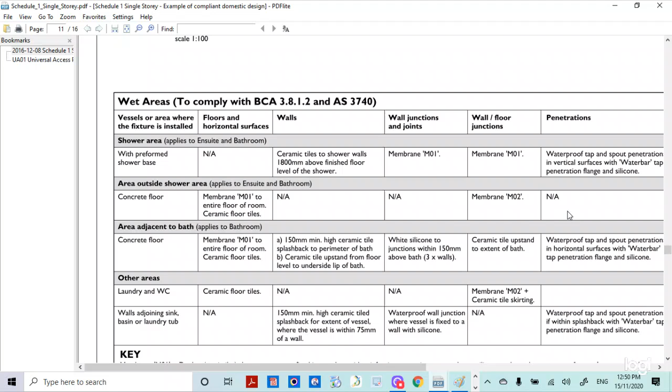For wet areas, the design diagram requirements are here. The wet areas are the shower and the bathroom - those are the wet area. This table shows details of construction, detailed components of the wet area.

Across the Australian standards, what do these comply with? Those things you can see in this table. So the wet area includes the shower area, outside the shower area adjacent to the bath, and other areas. Those areas are kind of construction for the floor and the horizontal surface, how they will be constructed, and the requirements for the wall and wall junction, the joints, and wall floor junction. Those are the components and parts of the wet area.

Depending on the wet area's construction method, appropriate presentation needs to be done. Those things you can see in the table - the components related to the wet area and what materials should be installed in the areas where water can reach. This is explained, and related to this, we will continue looking at the building design construction handbook.

So we also look at this component of the building design construction handbook. In this case, the required chapter to look at detailing is here - this is for the anchorage to the wall, anchorage to wall and the composite. Those are the components of the building design construction handbook.

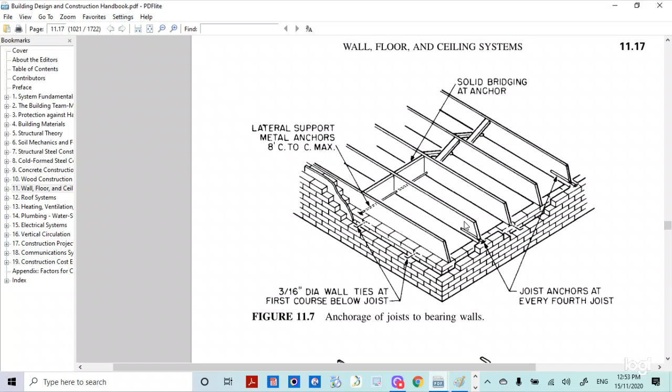So here you see this as the appropriate floor construction and wall construction, and also the anchorage and the bridging - how to bridge to the anchor and how to connect the joists. Those things you can see in 11/17. So those are the components of the anchor used between the masonry wall and the structural framing.

These are the figures of the anchors that connect the structural framing and the masonry wall. Those can be found in figure 11.8. So figure 11.8 shows this anchor for use between the masonry wall and the structural framing - the different kinds of anchor you can see in this diagram.

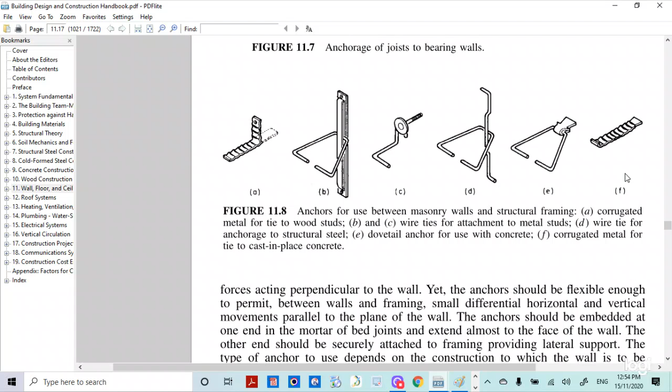Here this shows how to connect the anchor and the joist, their diagram. This one you can see how to connect the anchor and the joist in the diagram. And this is for how the concrete wall, how the concrete slab's construction diagram works - this is the anchorage.

This shows wall construction connection, how to apply the anchor. Between the wall and anchor, how it should be used is shown here. So this is for how an anchor is to be utilized between the floor and anchor - how to construct the anchor is shown here. So firstly we are talking about the building design construction handbook.

So this is the diagram. In the diagram shown here, this is the frame construction pattern that needs to be built. So this one shows the frame construction diagram - those are the components of the frame.

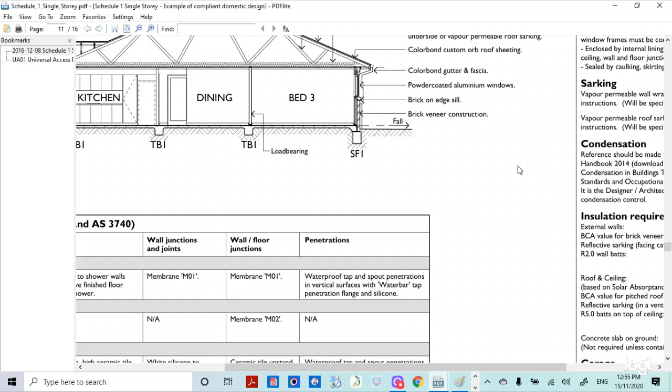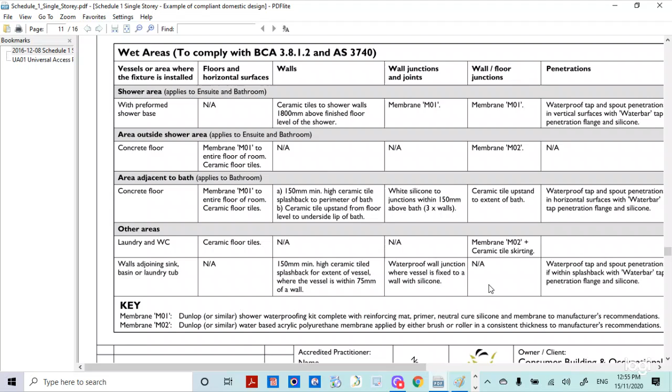They are civil construction, so the requirement to provide - the relevant chapter in the building design construction handbook is chapter 11/17. Continuing on, that is 11/17.

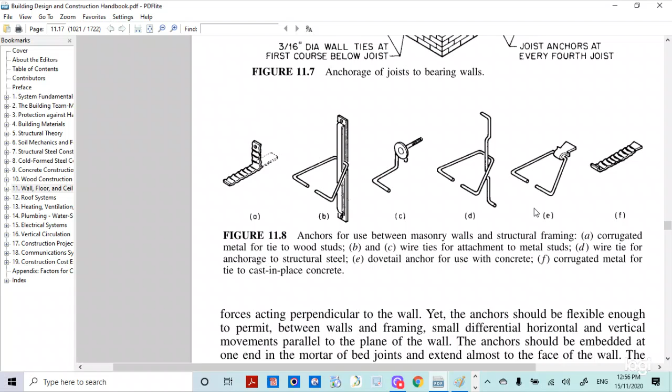Chapter 11/17 shows how building floor joists should be arranged. There's a connection anchorage of the joist to the building wall, and different kinds of anchors are shown. It also shows how floor, anchor, joist, and wall connections should be constructed - how to utilize the anchor and connect it to the beam and wall, as shown in this diagram.

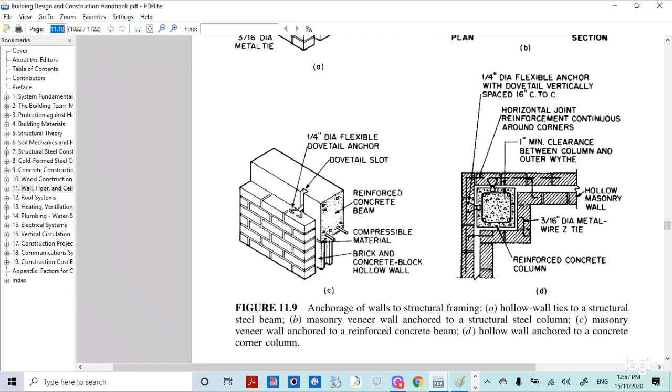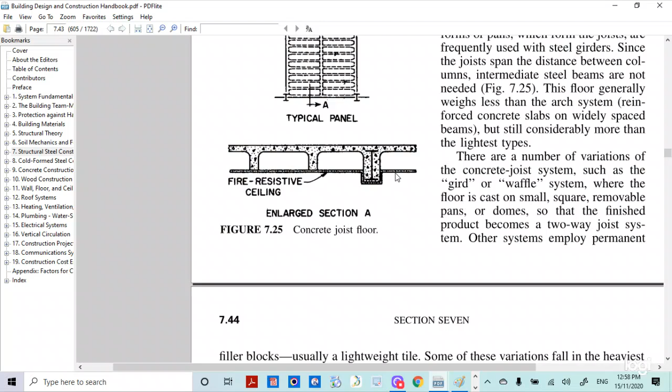This is for the concrete pan floor. Section 7.1.13.4 shows how concrete pan floors should be constructed, specifically regarding fire-resistant ceilings that protect against fire. This shows typical panels of the concrete pan floor and how the concrete pan floor and fire resistant ceilings are constructed, shown in section view. So 7.43 shows how to construct fire-resistant ceilings related to concrete pan floors.

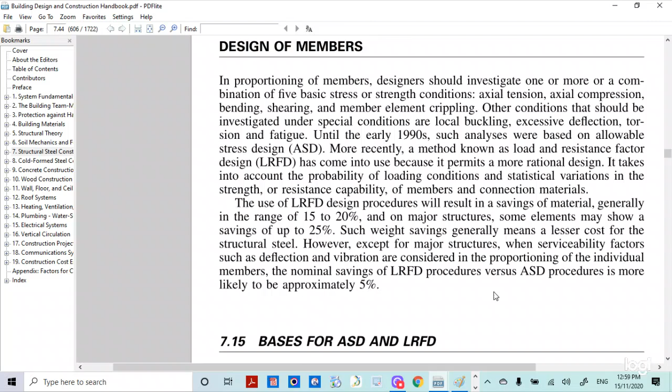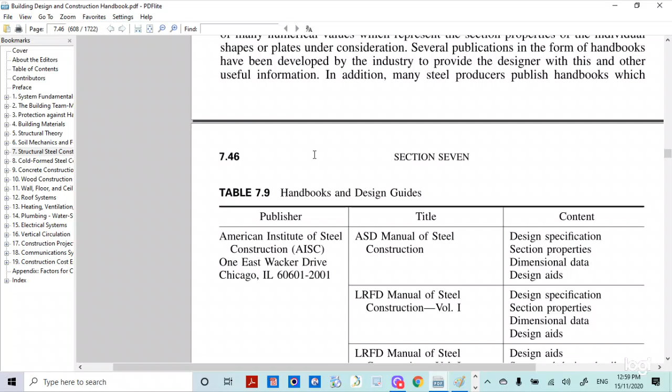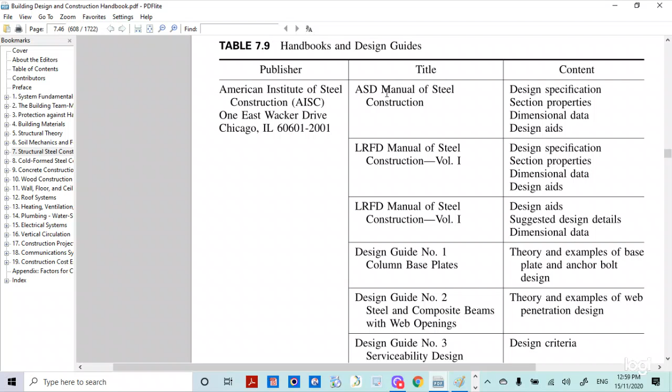These design references relate to steel construction - the necessary books, documents, and design aids that must be referenced. These are the reference materials: American Institute of Steel Construction (AISC) standards and their respective manuals and detailed content, which must be referred to for designing roof construction.

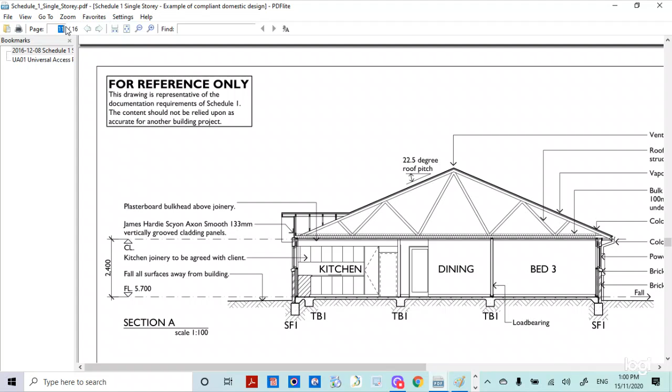This is in diagram 11, and also in diagram 6, showing frame construction - how the roof will be constructed, shown in elevation plan view. This plan view shows how to construct the wall frame and the roof.

This diagram and the previous diagrams combine to explain framing and roofing construction. This covers chapter 11.17, 7.43, and 7.44 of the building design construction handbook, which have already been presented.

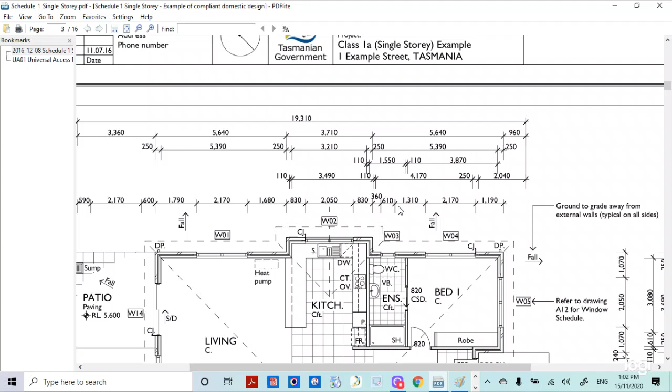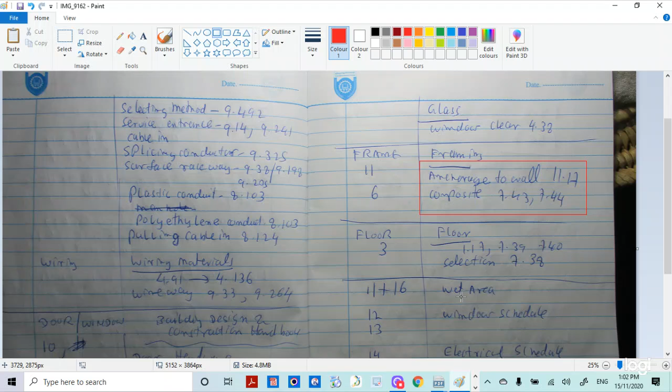Looking at the schedule plan, floor construction components are found in sections 1.17, 7.39, 7.40, and 7.38 of the building design construction handbook. These are the components of the building design and construction handbook regarding floor construction.

These sections are part of the building design construction handbook covering floor construction components. So we will continue looking at the respective topics of the building design construction handbook, firstly looking at 1.17.

Chapter 1.17 covers floor-related construction - this is for building construction, how the floor connects to things, and also covers the roof deck construction.

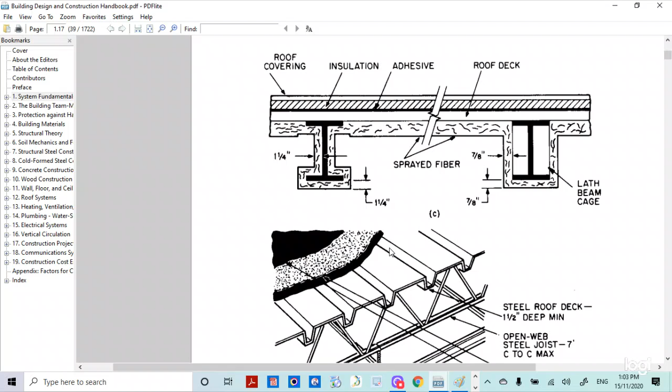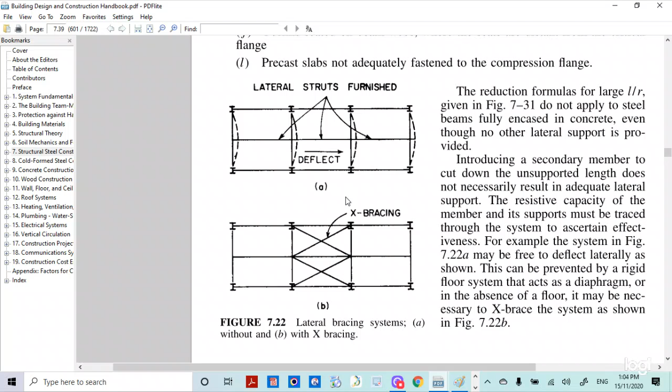This is about how to construct this supported beam and bracing, how to connect the supported beam and the bracing, and here you see the floor and the roof system, floor framing.

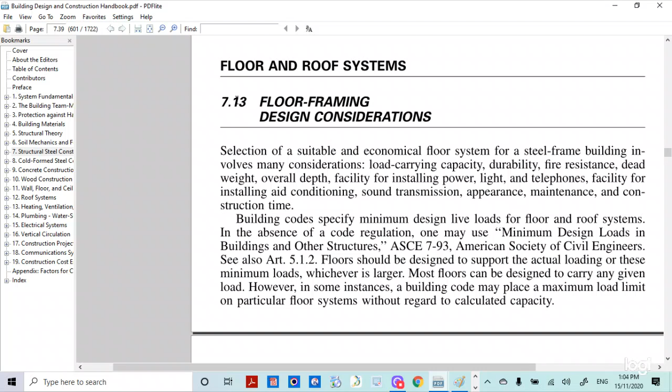Design and construction considerations can be seen in chapter 7.13, which describes in detail how to construct the floor. You can also see the steel joist floor. So 7.13 is detailed information regarding how to construct the floor.

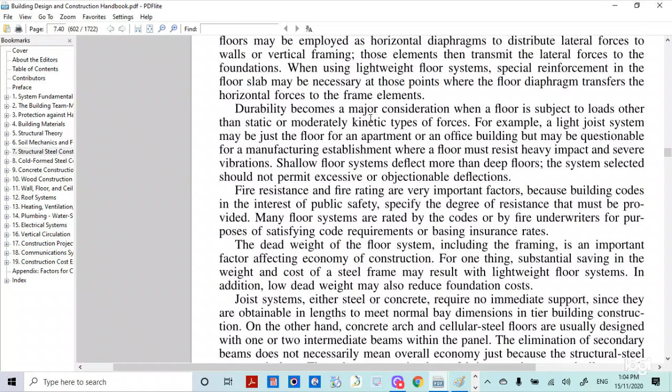7.1.3.1 is about the steel joist floor, the construction parts related to it. Here you can see the construction of the steel joist floor, showing how each part should be constructed.

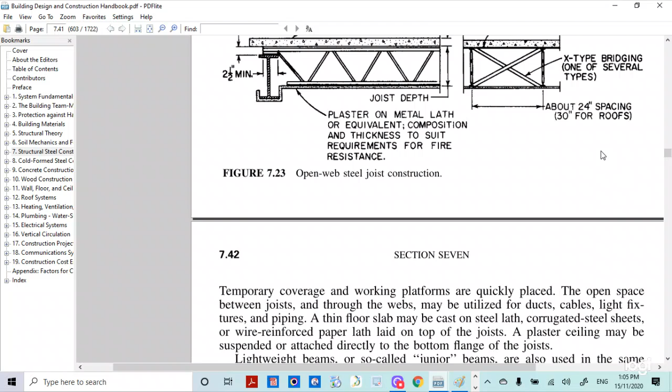This is about the construction detail methods for the steel joist floor and also the cellular steel floor. This is the construction method of the cellular steel floor, showing the construction related to it.

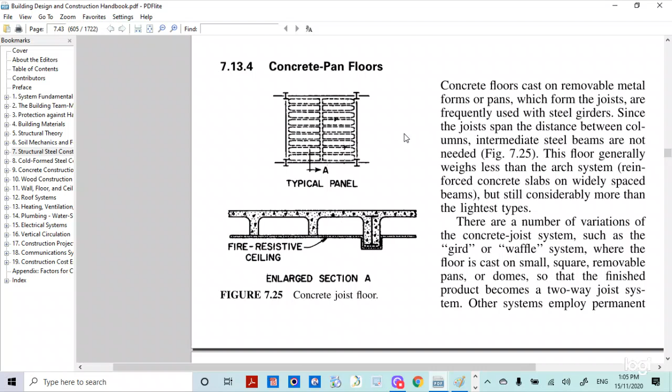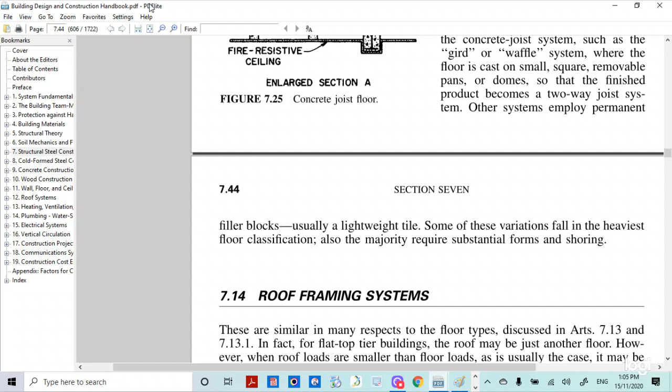Here you can see the concrete steel beam, concrete steel floor, pan floor, the concrete pan floor construction. These are the parts related to floor construction that you'll find in this section.

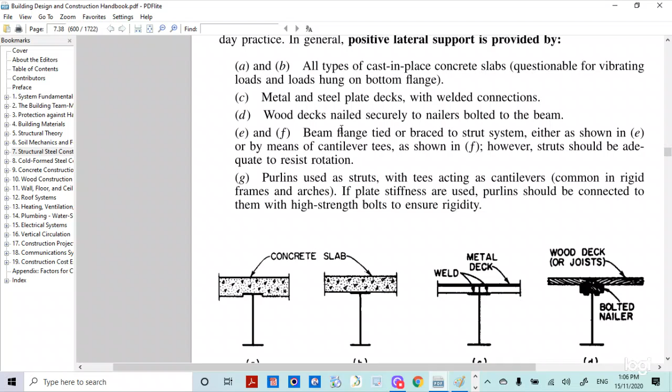So here you can see cast in place concrete slab, metal steel plate deck, and wood deck - those are constructions of the floor. This also covers how anchors should be constructed, related to supports, showing detailed construction regarding floor construction, concrete slab, metal deck construction, and how to put the stud and the angle.

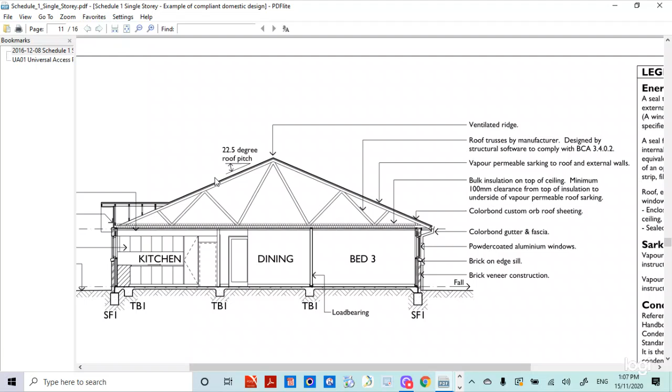Diagram 11 shows the floor-related construction in elevation views. This elevation shows how the kitchen and dining areas are located. Here in 11, it shows the kitchen dining room.

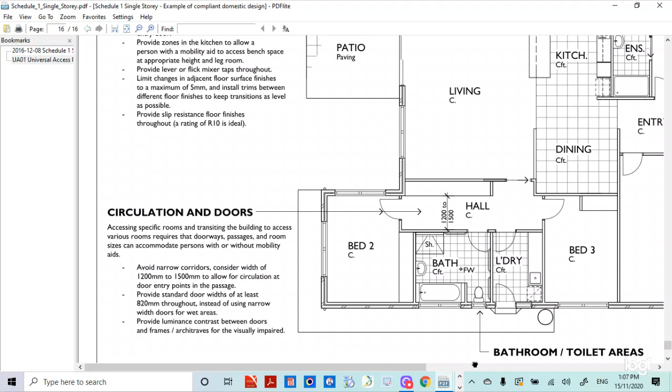Now this represents the detail construction, the location plan of the kitchen, dining room, living room, laundry, bathroom and toilet area.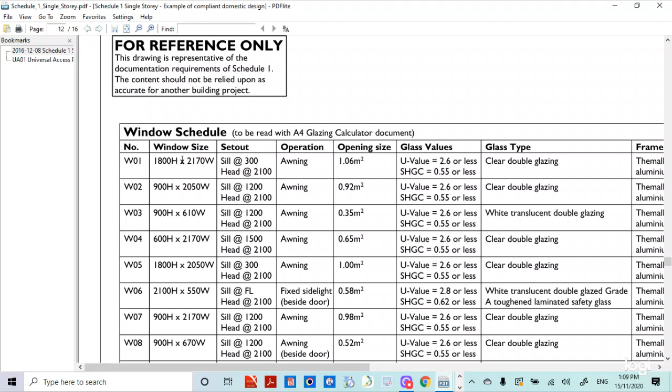On the diagram, we have to represent the door and window. Any door or window section must have a number assigned, so door one, window one, and so on need to be shown.

So after this, based on the doors and windows, we also need to allocate which door is related to which detailed information.

The door window numbering must show door one, window one, and so on - each with a corresponding table. On the floor plan, you need to allocate and number the doors and windows, then provide the table.

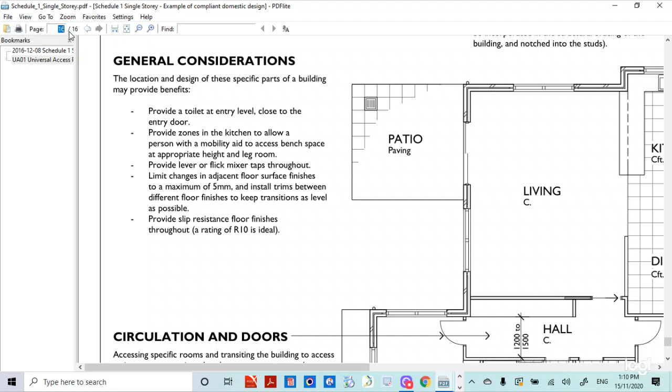The details describe the construction of the door and window. The door and window diagram must show this, so we need to look at the door and window arrangement.

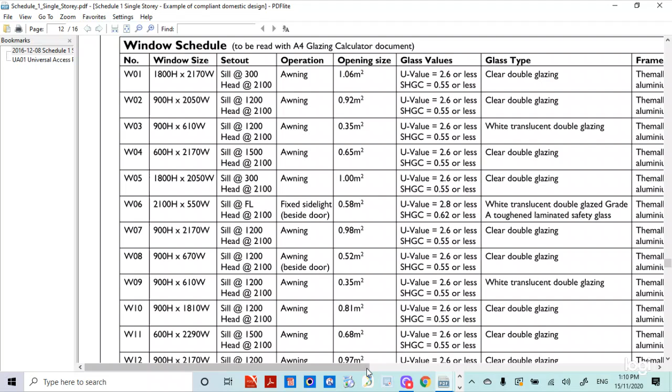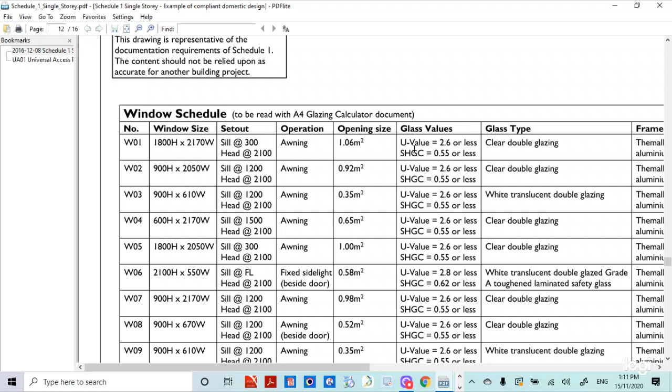So here is this diagram showing the details of construction regarding the door and window. For example, our window number 01. You have to provide the size of the window, how to set it up, how the window operates, the opening size of the window, the heat transmission value of the window, the type of glass, the frame type, how to frame the door and window, and also orientation and regarding notes. Those things are on the door and window schedule.

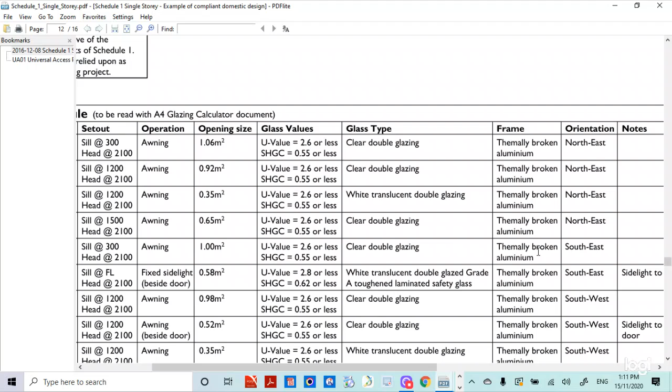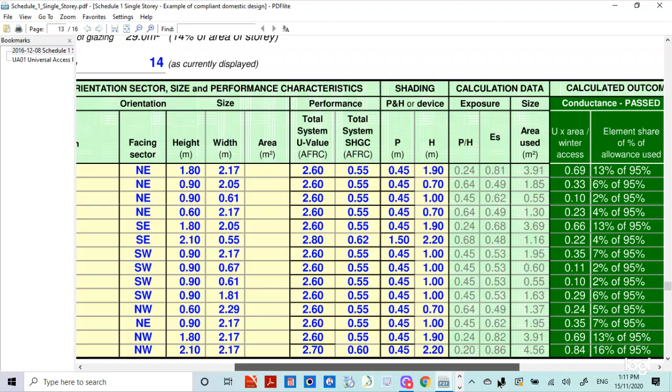We can also utilize a computer program to calculate how much shading and performance we get. The computer program can calculate heat transfer, how much shading, how much solar energy gain, how much conductance, how much heat can flow into the building, using this appropriate computer software.

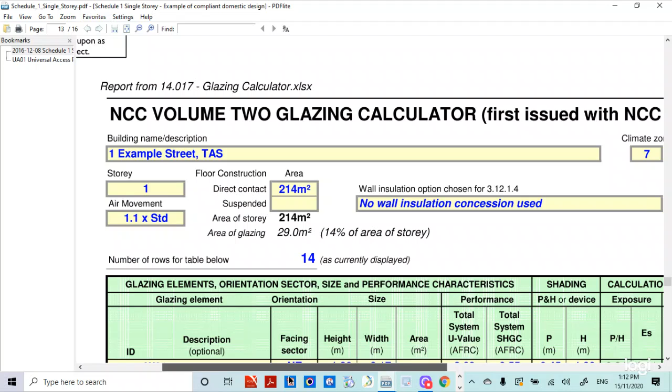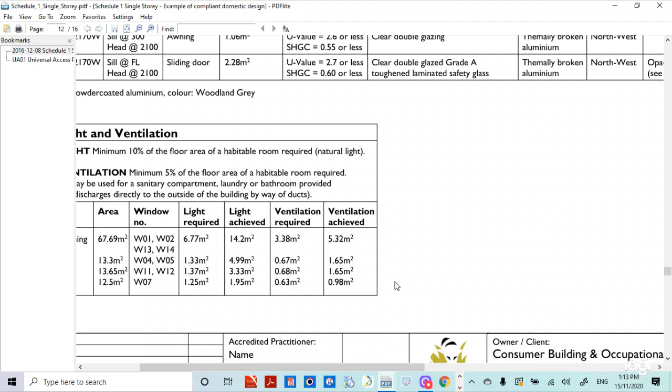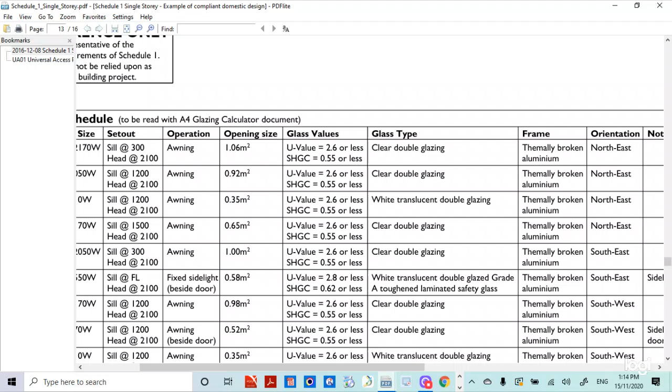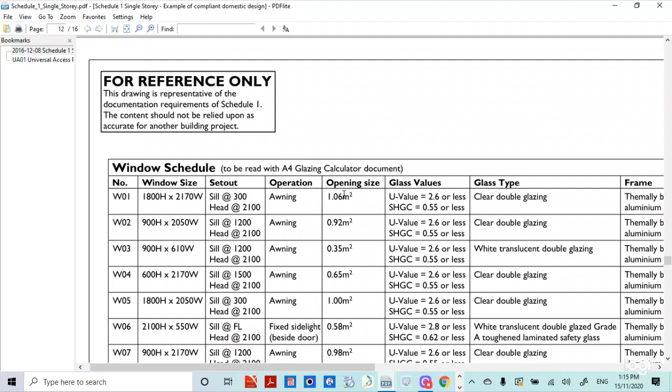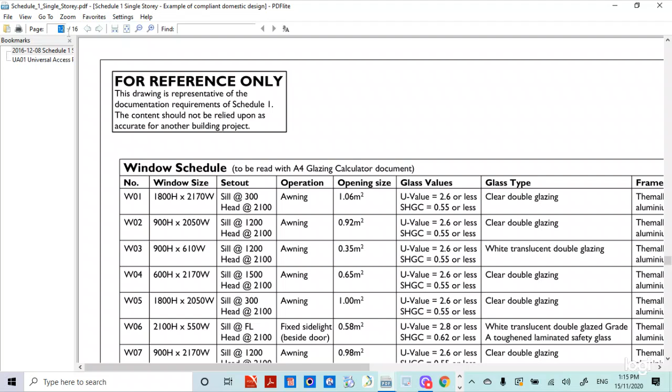Regarding the door and window, you can see the door and window number - window number 01, 02, 03, 04. You have to allot numbers to the door and window on your floor plan, and after that detailedly describe the construction method of the door and window: the number, appropriate window size, setout, operation, opening size, glass value, glass type, and frame type. Those things you have to write down, how they will be constructed, and then calculate the heat transfer using the appropriate computer software method, so how much heat can be passing through the door and window number, appropriate heat transfer value - those things have to be calculated. Those are the construction details regarding this door and window.

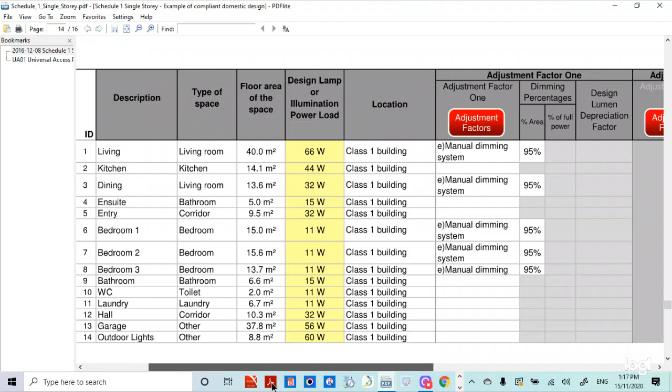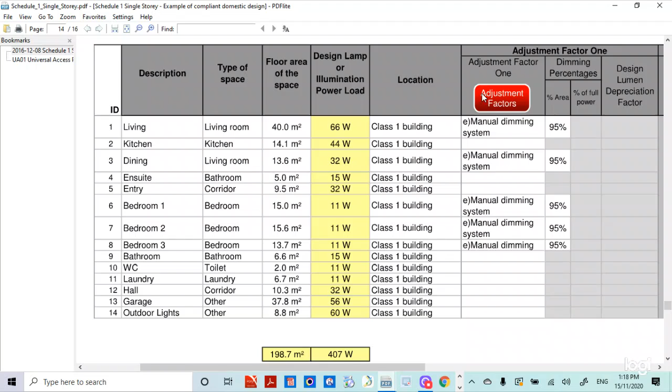That's the electrical schedule. In the electrical schedule, you have to allocate the component of your area, the purpose of the space, and the floor area of the space. You also have to provide the design lamp or illumination power load, the location, and the appropriate control aspects. Those need to be expressed. So this is the electrical schedule.

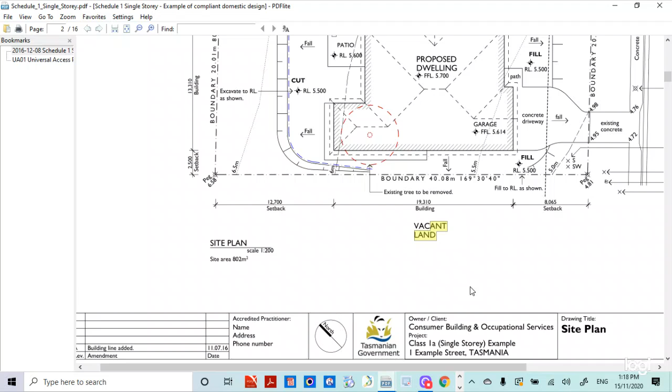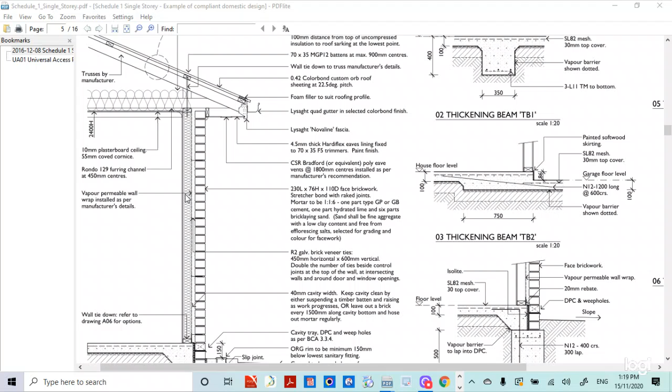Then we talk about the foundation, followed by bricklaying and the construction of the wall. We also explain how to construct the column, wall, and the foundation method.

Then we covered the door, window, and roof construction, and after that the sanitation and plumbing aspects, including drainage, and then the electrical construction.

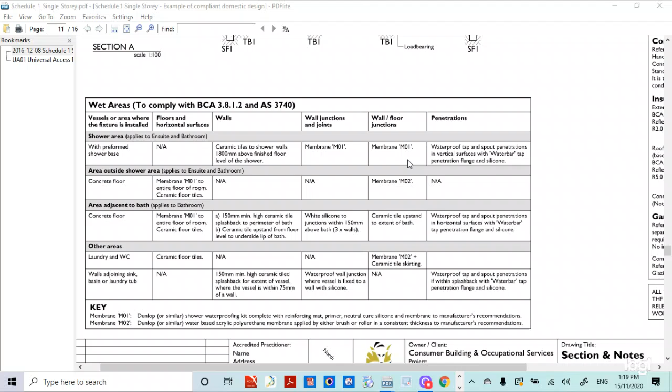Then we talk about the construction of the door, window, and frame, and also the wet area construction that needs to be done.

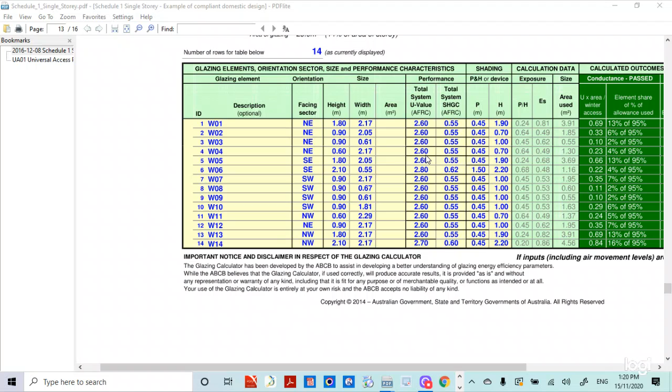Then we talk about the window schedule, the heat transfer to the door and window, and finally the electrical schedule. So this is the detailed construction of the building.

So this is the civil engineering aspect. I talked about the construction of the building and its related information.

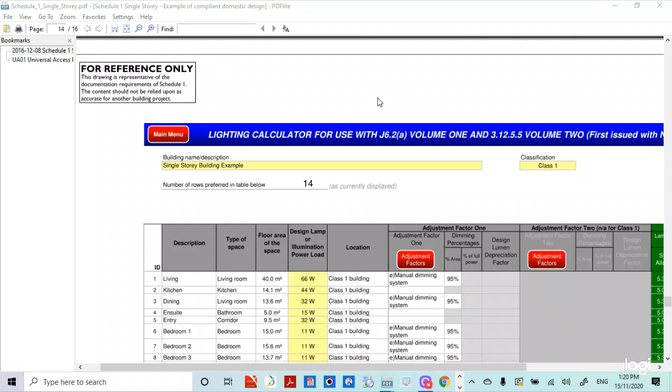Together with this information, I also provide you the appropriate electrical service and mechanical aspects. The electrical and mechanical aspects relate to the electrical schedule, while mechanical relates to heat transfer, which the mechanical engineer handles. This way, the electrical and mechanical aspects form the building service, so together with the construction aspect, I provide you the electrical and mechanical aspects.

Heat transfer is related to the mechanical engineer, while the electrical schedule is related to the electrical engineer. Those show how the electrical, mechanical, and civil construction engineers work together to construct the building.

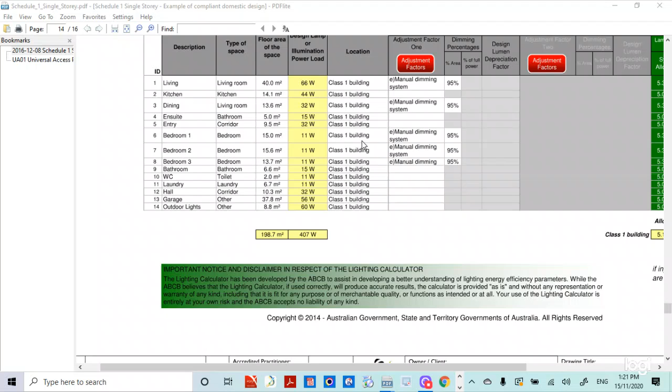Now for the building, that's lesson 2. Lesson 3 will cover the civil construction schedule sample, so regarding this aspect, we will continue to talk about the sample construction schedule. This is lesson 3.

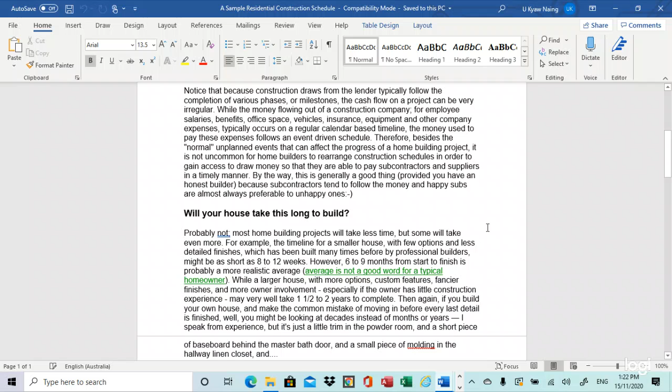So this one is a sample residential construction schedule. I provide you this information note through my web link, and you also need to read about how the construction schedule works, as shown in the sample schedule.

Look at the paper and the timeline in the paper. I made sure to include a report about the sample construction schedule for you to look at.

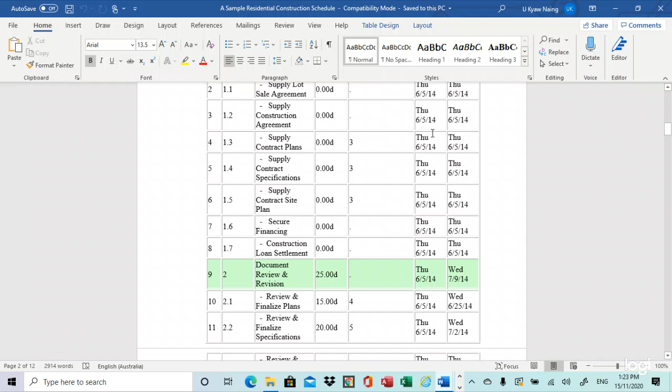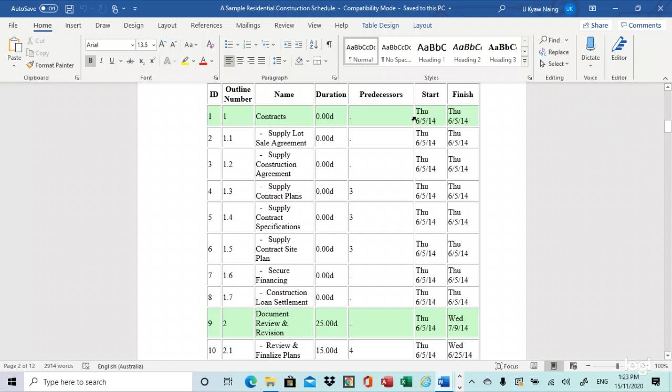This is task number, outline number, you have to put the ID and the name of this task, and also the duration, the start date and the end date. This is for the construction schedule example.

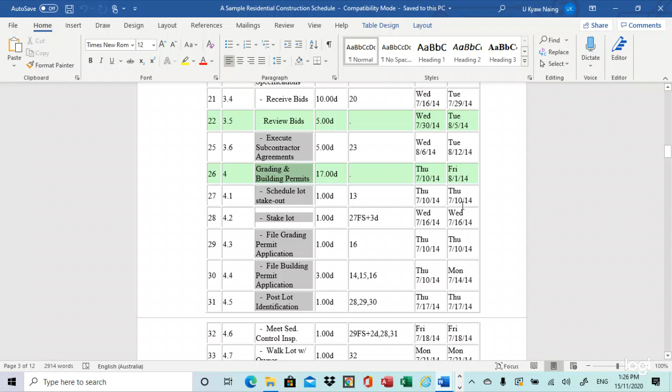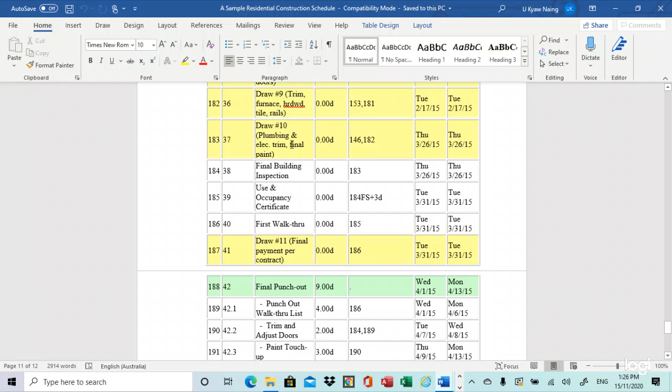Here you can see the construction schedule information regarding floor, post, sidewalk, building decks - those things you can see here, and those topics you can look into the building design and construction handbook.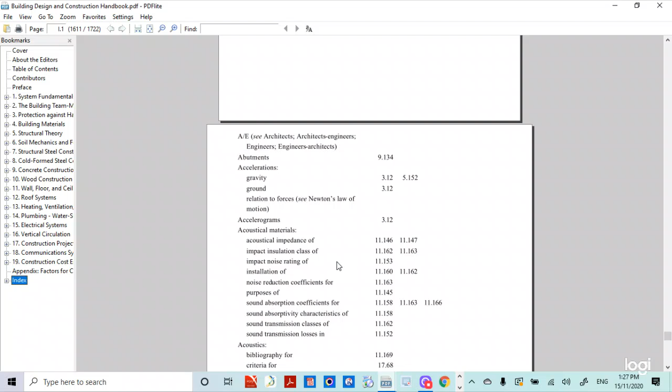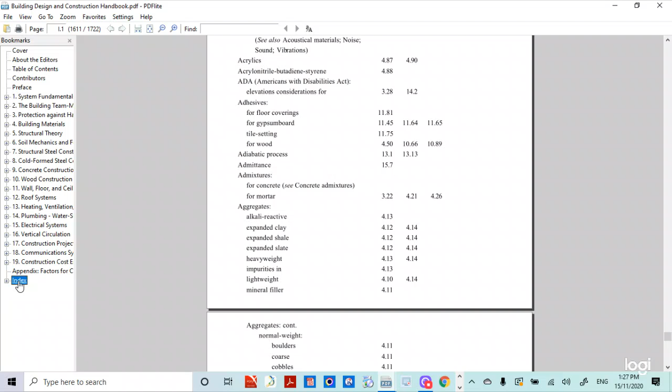So this is for the chapter contents, and as well you will see the index. In the index you can find the appropriate word and then the appropriate clause number. By this way you can find out the detailed information.

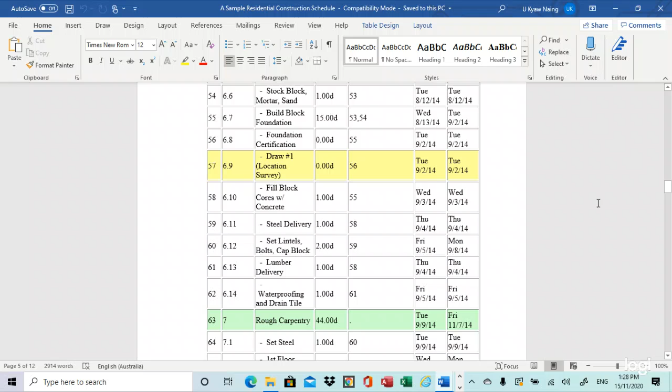So I give you the building construction schedule report on my website for the IGY students, as well as I will provide you the link to download the building design construction handbook. So your task, your duty, is you have to look at this.

Those are what - and then we find out the appropriate detailed information in the building design construction handbook, so that when you are using the handbook, you use it two ways.

You use the chapters index as well as the final index. Every chapter contains contents as well as a final index. In the final index you can see what appropriate chapter topics are provided, and by this way you can find information in the building design construction handbook.

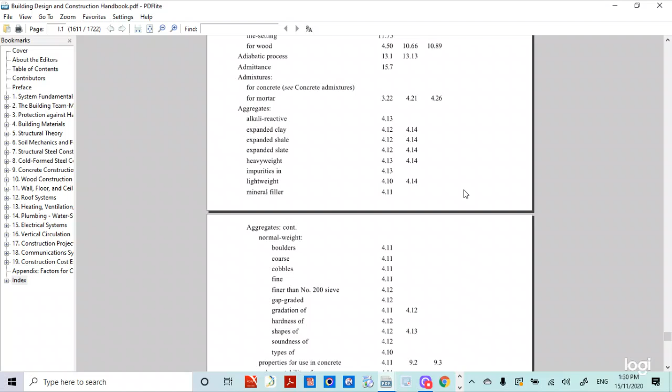In lesson 3, for the electrical engineers, I will give you the electrical service design report - you have to find detailed information. And for the mechanical engineers, I will give you the machine design project - you have to create your own idea by referring to the handbooks and textbooks I will provide.